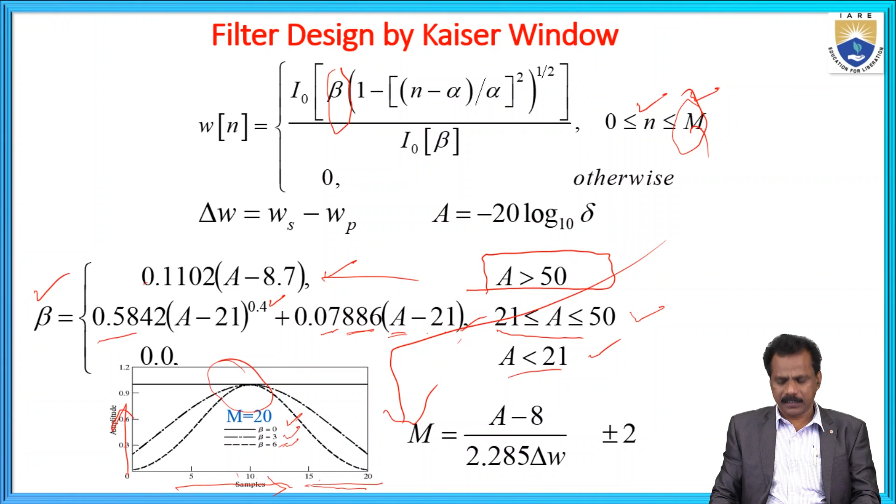With this, the best example is the Kaiser window design of the low pass filter. So we use all these specifications for the graphical representation.

After that, h of n is equal to sine omega c of (n minus alpha), times I naught of beta of 1 minus n minus alpha by alpha square, whole power 1 by 2, divided by I naught into beta. Here also the same condition: 0 less than or equal to n less than or equal to M.

So with this, otherwise 0, where alpha is equal to M by 2; M is already calculated, but here alpha is equal to M by 2, which is equal to 18.5.

So with this, we consider the same beta values. Based on the beta value, M is ready to be identified, and the A value: A greater than or equal to 50, 21 less than or equal to A less than 50, and A less than 21.

Like this, the Kaiser window design of the low pass filter will appear, where A is equal to minus 20 into log base 10 of delta, and delta omega equal to omega s minus omega p.

Next example, based on the same example, we have to follow this step-by-step procedure for designing the Kaiser window design of the low pass filter.

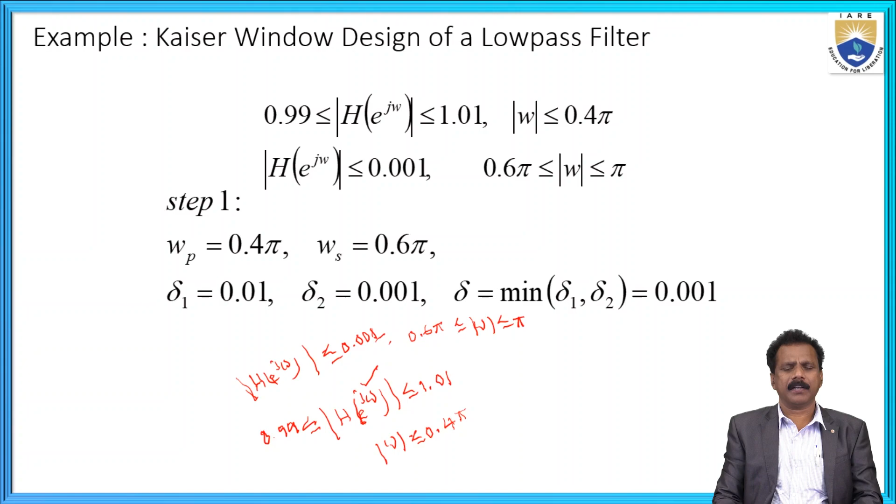So based on this, we follow these steps. Step 1: consider omega p equal to 0.4 pi, omega s equal to 0.6 pi, delta 1 equal to 0.01, delta 2 equal to 0.001, and delta equal to minimum of delta 1 comma delta 2, equal to 0.001. With reference to step 1, we directly write the omega p, omega s, delta 1, delta 2 and delta values ready to be assigned.

Now coming to step number 2: the cutoff frequency omega c is equal to omega s plus omega p by 2, which is also equal to 0.5 pi.

Now coming to step number 3: delta omega is equal to omega s minus omega p, equal to 0.2 pi, where A is equal to minus 20 log base 10 delta, equal to 60, where beta is to be substituted.

Beta is 0.5653, where M is equal to 37. Substituting the A value, A is equal to minus 20 log base 10 delta, equal to 60. From that value, M is substituted as equal to 37. This is related to step number 3.

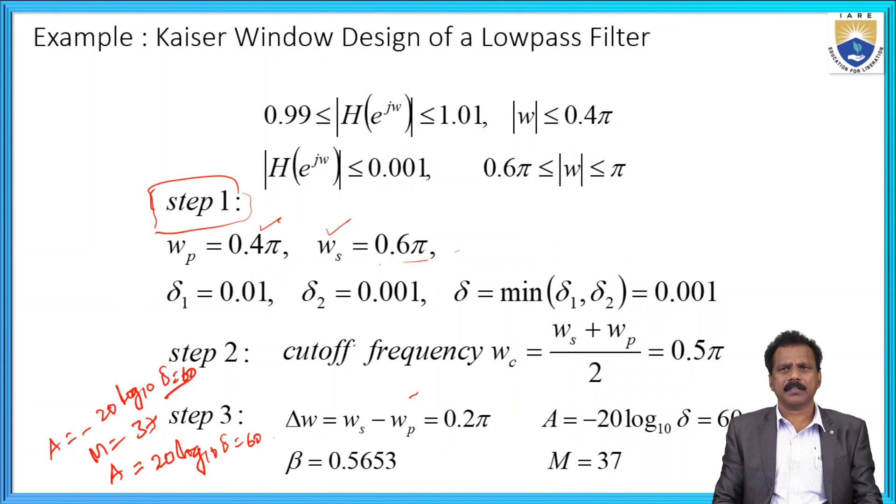Step number 3: delta omega is equal to omega s minus omega p, equal to 0.2 pi. A is equal to minus 20 into log base 10, and delta is equal to 60. So M is calculated as A minus 8 by 2.285 delta omega, approximately 37, that M value. You got the M value.

Now parallel with this, beta is equal to 0.5653. But according to this beta, we know there are conditions: A greater than 50, 21 less than or equal to A less than 50, and A less than 21, using these typical values.

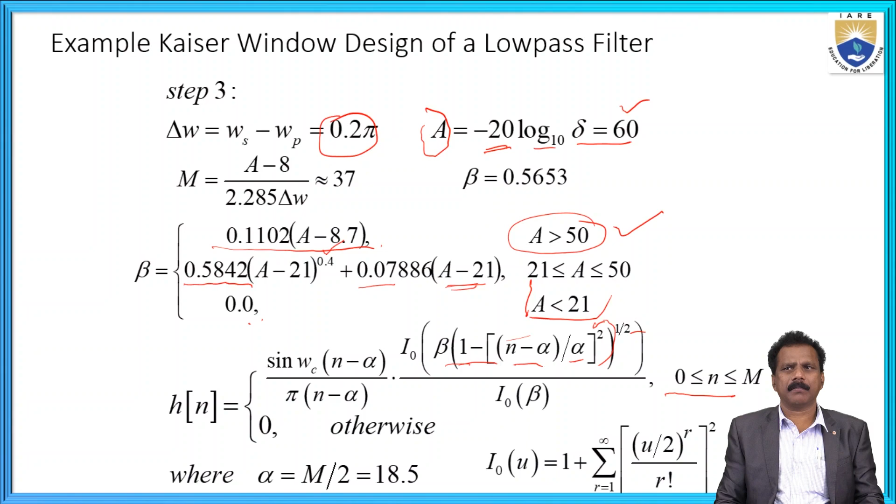Okay, the range 0 less than or equal to n less than or equal to m, that means here it is. So we measure I naught of u is equal to 1 plus summation r equal to 1 to infinity of u by 2 of r by r factorial whole power 2. Okay, so this is the mathematical analysis of this.

So after that, using a piece of code, we are to verify that the response h of n is sine into omega c into n minus alpha by pi of n minus alpha, into I naught of beta of 1 minus n minus alpha by alpha whole square, whole power 1 by 2, by I naught of beta, with 0 less than or equal to n less than or equal to m. With this, we plot number of samples versus amplitude, to see how the response varies, and what are the main lobe and side lobes, to verify.

After that, to decide where it is useful, the Kaiser window design of a low pass filter, whether it's suitable for either recursive or non-recursive, easily to compare what is the importance of this particular window, like in a Kaiser window design of a low pass filter.

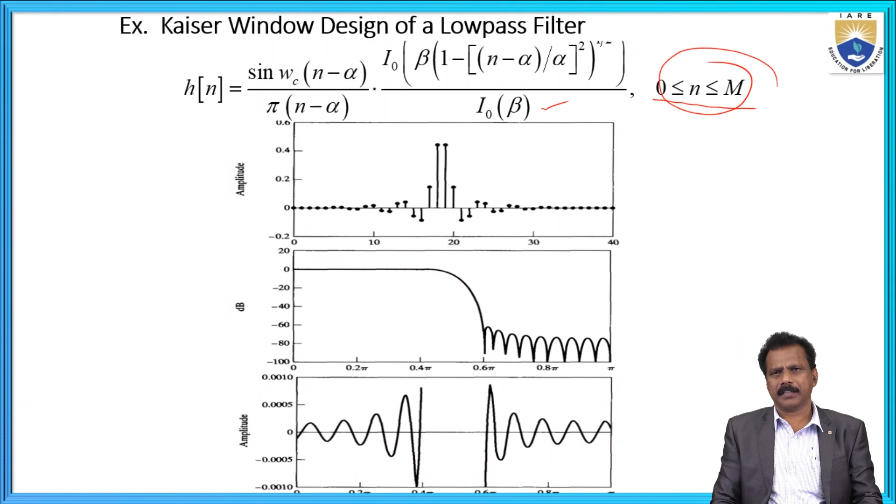Now coming to the relevant examples of finite impulse response filters designed by the Kaiser window method. The ideal high pass filter with generalized linear phase, you have to consider this mathematical relation, where previously we have seen the low pass filter. Now we want to consider the high pass filter with e power j omega equal to 0.

At mod omega less than omega c, e power minus j omega into m by 2, at omega c less than or equal to mod omega less than or equal to pi.

h high pass of e power j omega is equal to e power minus j omega m by 2 minus h low pass of e power j omega. So with this, you can easily measure that h high pass of n is sine pi of n minus m by 2, by pi of n minus m by 2, here also with m by 2.

Minus sine into omega c of n minus m by 2, by pi of n minus m by 2, at minus infinity less than or equal to n less than or equal to infinity.

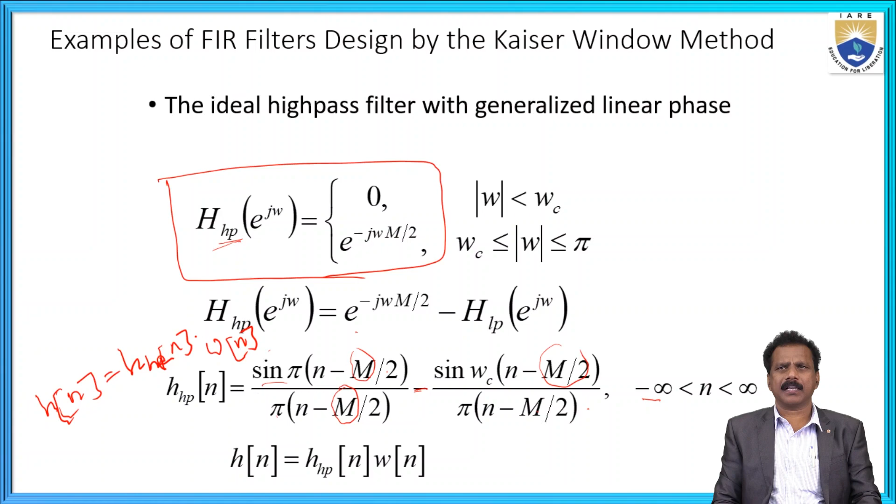Now for the Kaiser window design of the high pass filter, we have to follow certain specifications. The specifications available: mod H d of omega less than or equal to delta 2, where mod omega less than or equal to omega s. This is one way, and 1 minus delta 1 less than or equal to mod H d of omega less than or equal to 1 plus delta 1, at omega p less than or equal to omega less than or equal to pi.

Where omega s is already decided as 0.35 pi, omega p is 0.5 pi, delta 1 is equal to delta 2, which is also equal to delta, which is equal to 0.021. So by the Kaiser window method, beta is equal to 2.6, m is equal to 24.

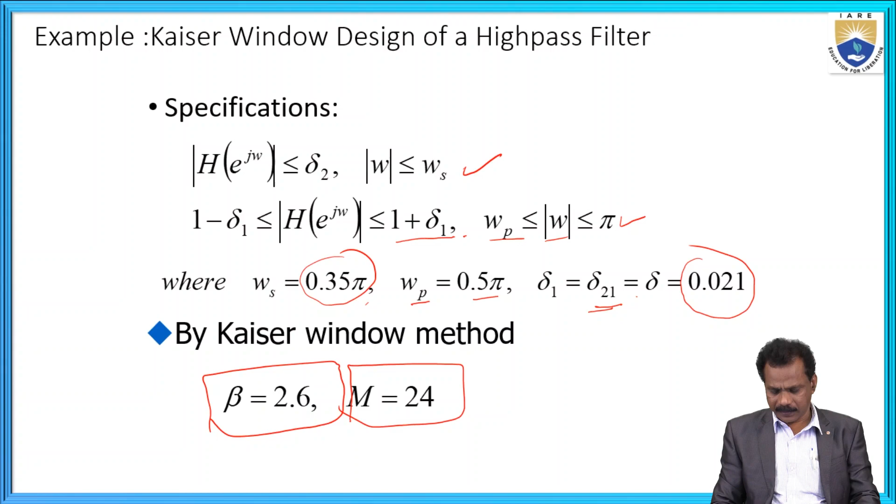In this particular Kaiser window methodology, we have to consider m equal to 24, where beta is equal to 2.6. So with this, after that, try to compare the comments on recursive or non-recursive, so FIR and IIR filter, discrete filter design.

If you are using the IIR filter, closed form formulas, yes. Generalized linear phase, no. Order is lower. Coming to the FIR filter, closed form formulas are not necessary, but generalized linear phase is required, yes, and order is high. So based on this, if you are using the IIR filter it is lower order, if you are using the FIR filter it is higher order. These are the components of IIR and FIR discrete time filters.

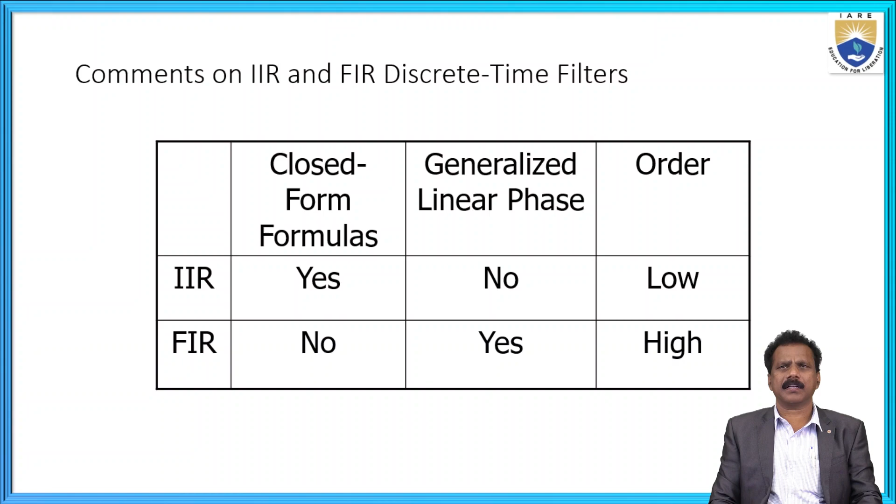By using these comments, you are ready to design according to your task or desirability. If you have any specific response requirement, based on that we have to consider these comments on IIR and FIR discrete time filters.

Now, based on this analysis, what are the filter realizations with rectangular and Hanning windows? Previously we have seen the Kaiser window and Hamming window, but especially in this case, filter realized with rectangular Hanning window. This is related to the response with the rectangular window where M is equal to 16. How does it appear graphically, where H of omega and H d of omega vary in amplitude versus the M value, up to M is equal to 16.

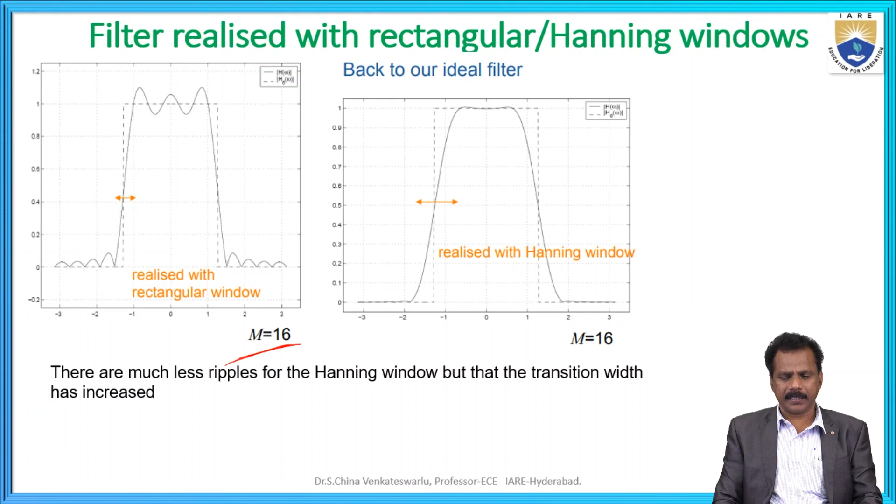So here we are back to our ideal filter realized with the Hanning window where M is equal to 16. Compare the rectangular window and the Hanning window realization. The M value is equal, but whatever is realized with the Hanning window versus the rectangular window, there is much less ripple for the Hanning window, but the transition width has increased compared to the rectangular window.

So another filter realized with the Hanning window, easy to compare. The transition width can be improved by increasing the size of the Hanning window to M is equal to 40. Previously it was mentioned only for M is equal to 16. Here the Hanning window M value goes on increasing, 16, 17, 18, up to 20, 25, up to 40.

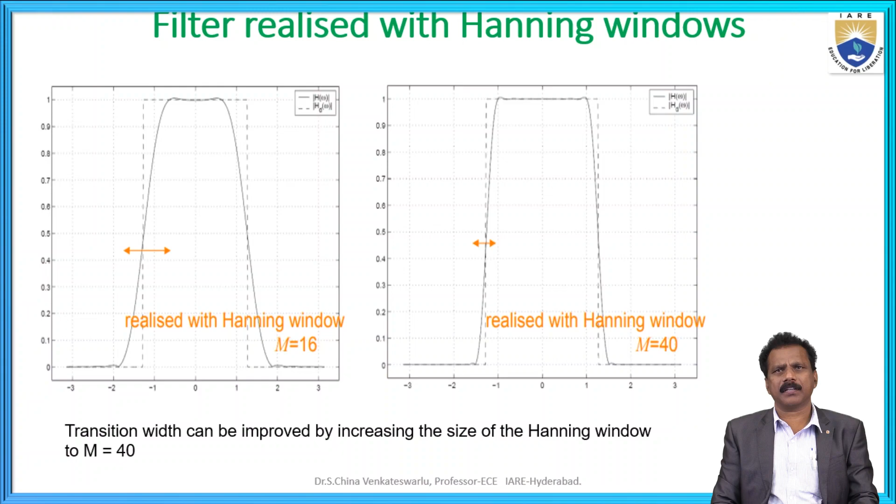So to verify, the filter realization with the Hanning window shows that transition width can be improved by increasing the size of the Hanning window up to M equal to 40, from the initial M equal to 16 to 40. So finally we can decide on the filter realized with the Hanning window. With reference to this, we have already seen the Kaiser window, Dolph-Chebyshev window, and Hamming and rectangular window.

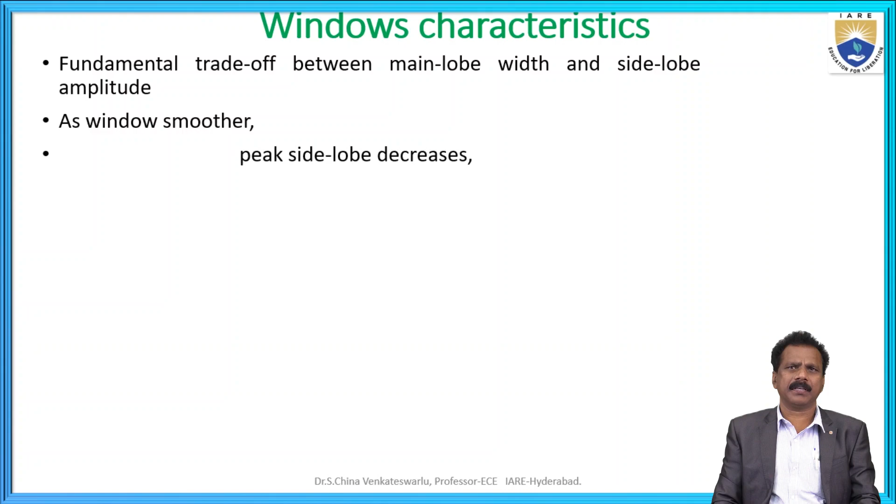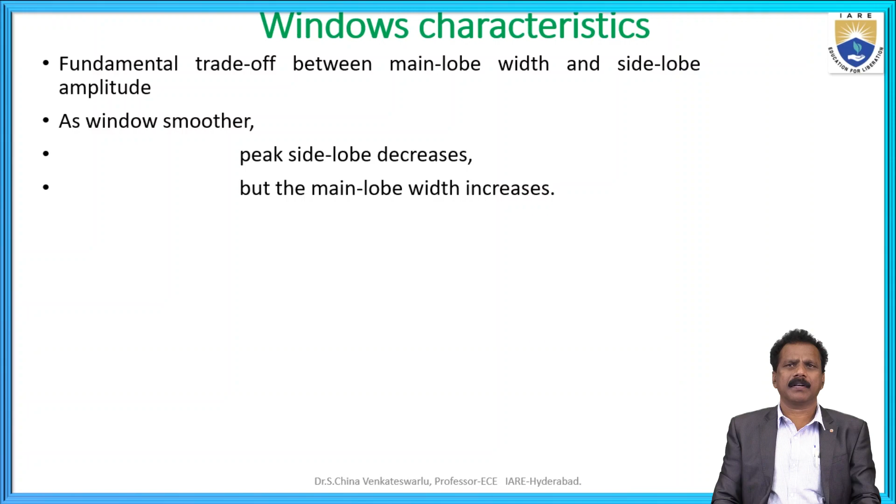So using all these designs, do our windowing characteristics reach our task or not? To verify that, we require these window characteristics. There is a fundamental trade-off between the main lobe width and the side lobe amplitudes. As the window gets smoother, the peak side lobe decreases, but the main lobe width increases. So we need to increase the window length to achieve the same transition bandwidth.

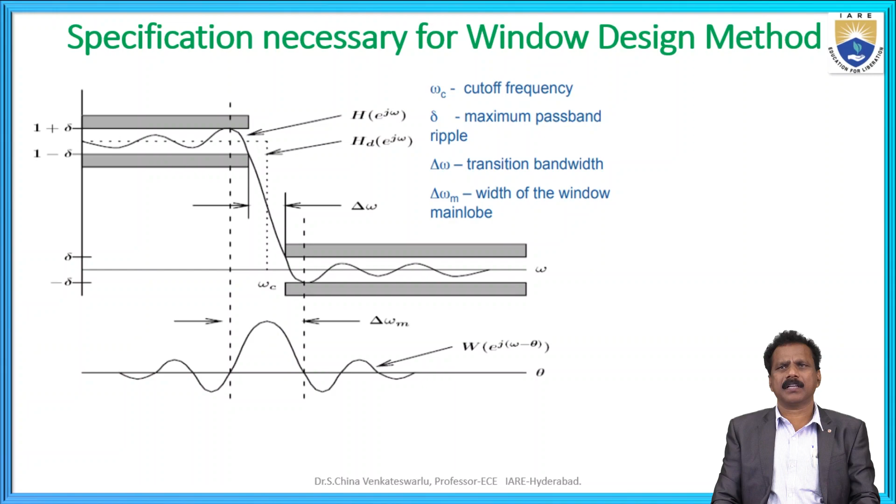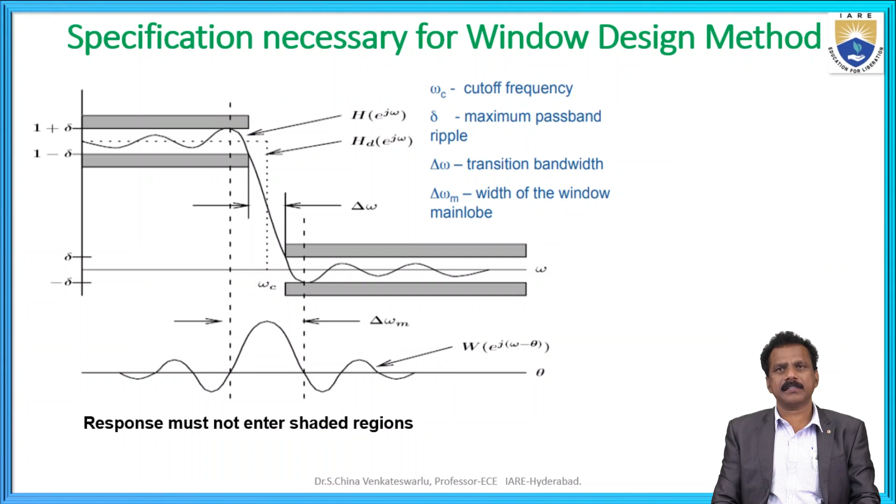So what are the specifications necessary for a window design method? We have to follow these specifications: cutoff frequency, maximum passband ripple, transition bandwidth, and width of the window main lobe. With this, the response must not enter the shaded regions, which we can analyze.

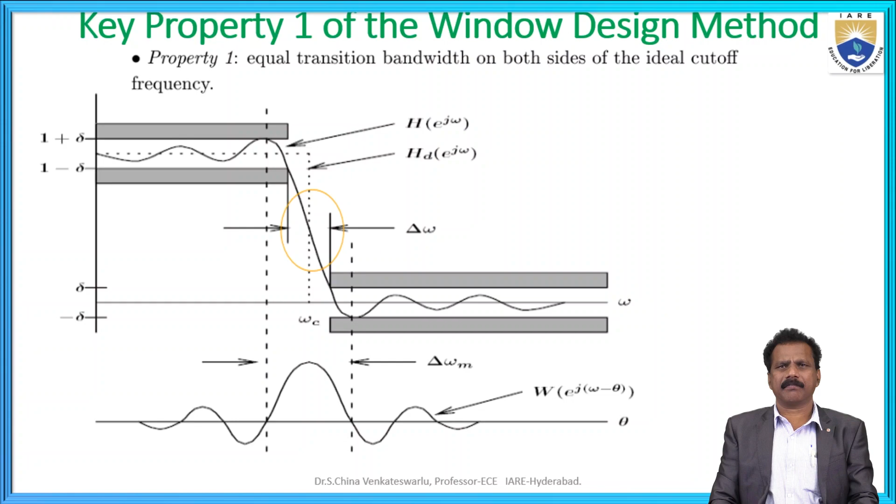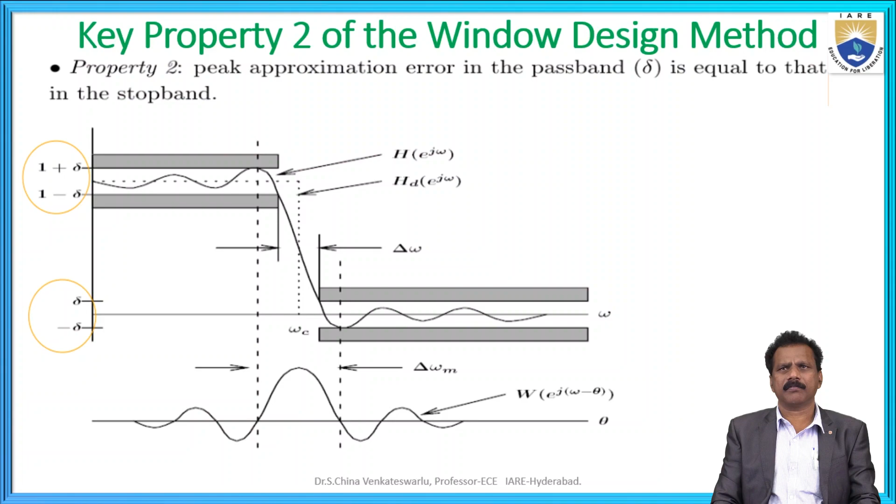Now there is a key property of the window design method we have to consider. Property 1 is equal transition bandwidth on both sides of the ideal cutoff frequency. The second key property, using this graphical representation: property 2 is that the peak approximation error in the passband, delta, is equal to that in the stop band. This is key property 2 of the window design methodology. Now coming to key property 3 of the window design method.

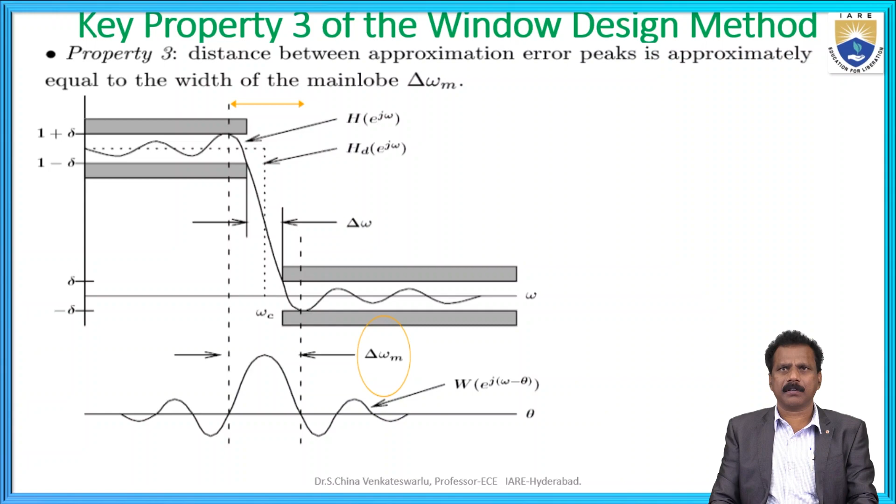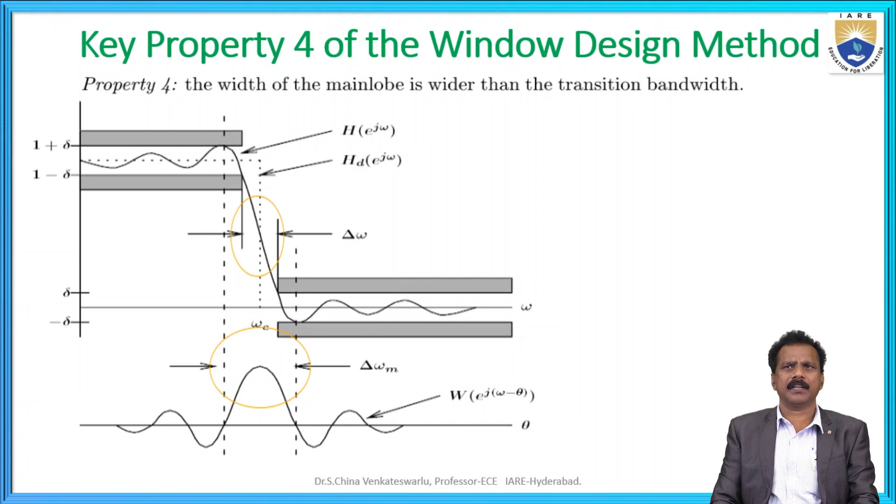Using this graphical identification, property 3 states that the distance between approximation error peaks is approximately equal to the width of the main lobe, delta omega m. Next, property 4 states that the width of the main lobe is wider than the transition width.

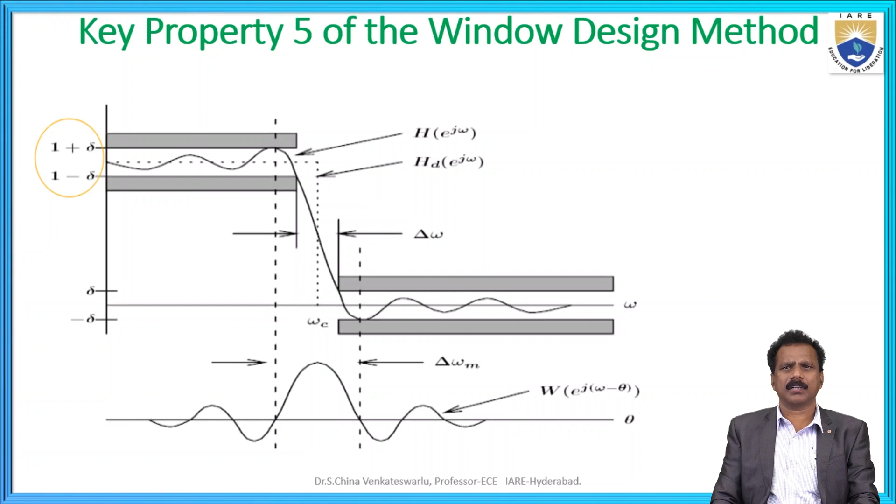Coming to key property 5 of the window design method, using this graphical representation: peak approximation error is determined by the window shape, and the window shape is independent of the filter order. So directly, peak approximation error is determined by the window shape.

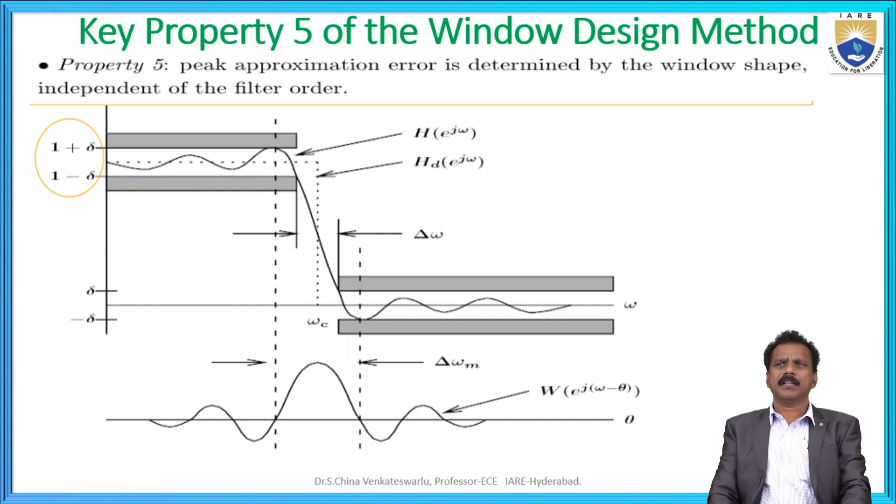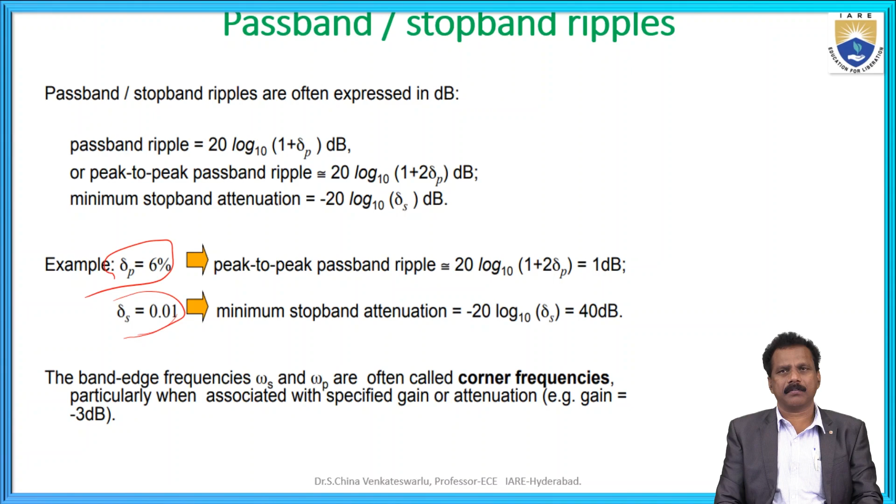One is the corner frequency, particularly when associated with a specified gain or attenuation. The best example is where the gain is equal to minus 3 decibels.

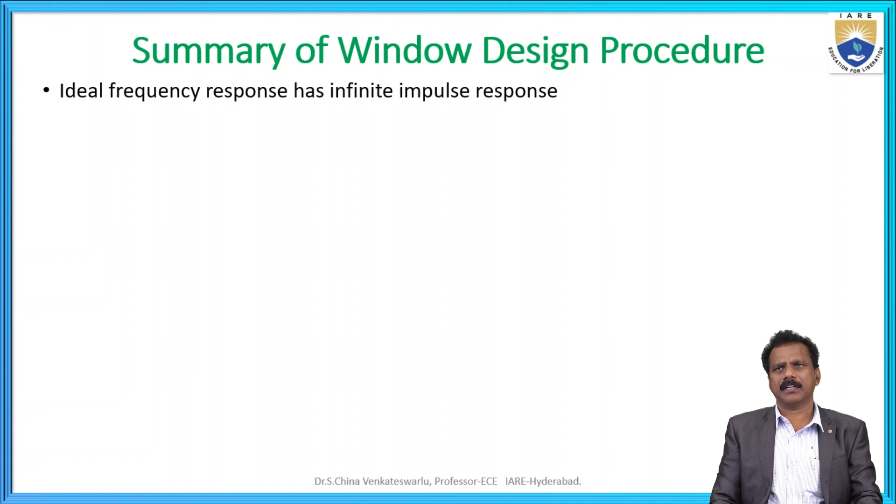First, the ideal frequency response has an infinite impulse response. Second, to be implemented in practice, it has to be truncated and shifted to the right to make it causal.

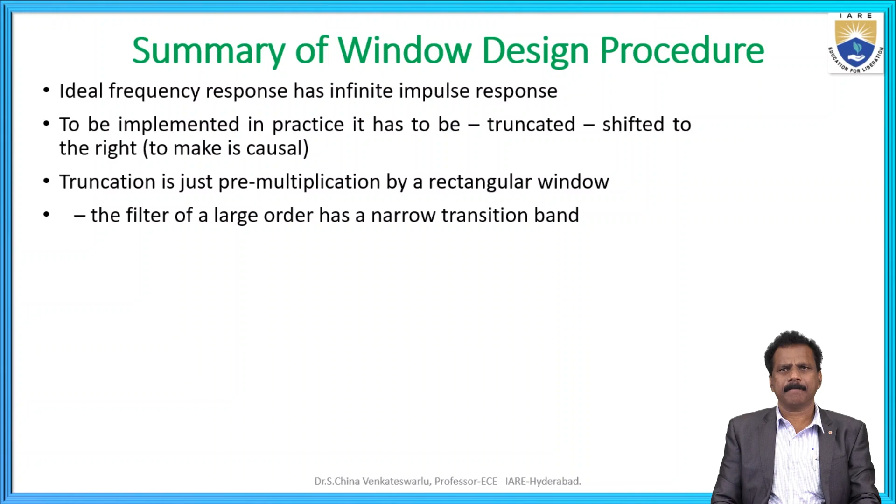Third, truncation is just pre-multiplication by a rectangular window. Fourth, a filter of large order has a narrow transition band.

We have to follow this window design procedure. As we've already seen, it is popular to use windows with no abrupt discontinuity to reduce the Gibbs phenomenon. The best or suitable windows are Hamming and Blackman.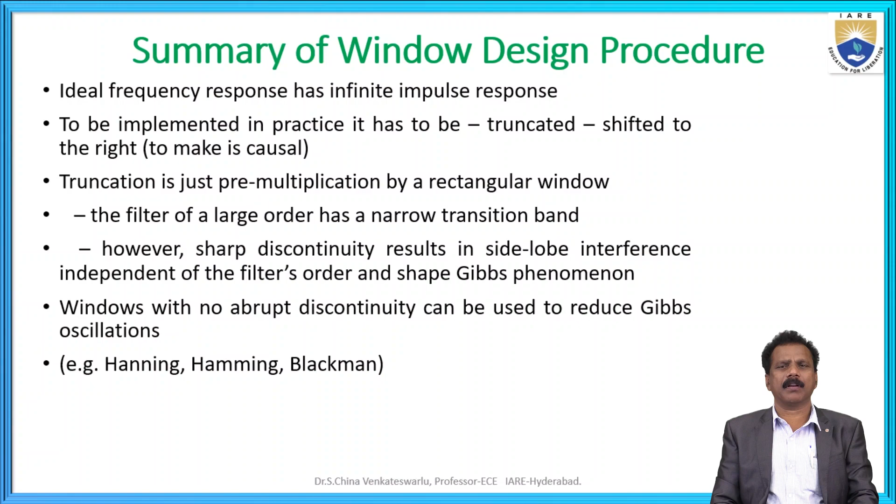So what are the advantages and disadvantages of the windowing technique? After designing using the windowing technique, what are the merits and demerits? The first merit is that it is a simple method to implement to get the desired response.

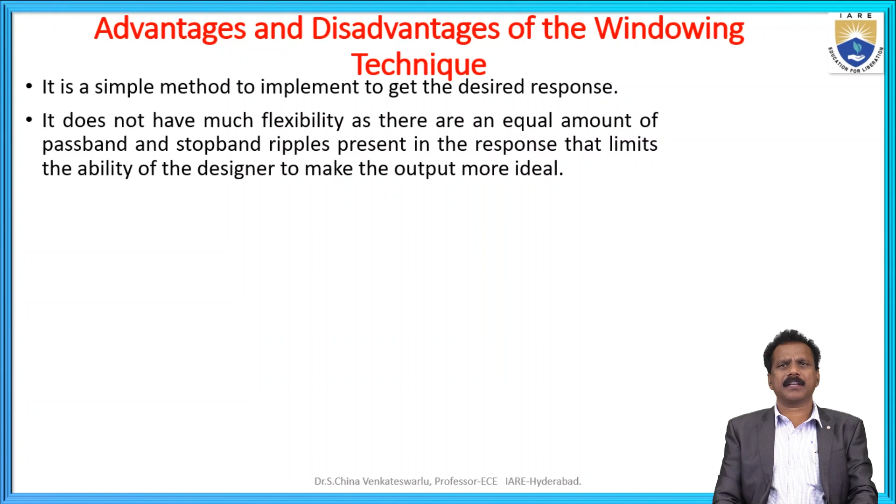The second point is that it does not have much flexibility, as there is an equal amount of passband and stopband ripple present in the response, which limits the designer's ability to make the output more ideal. This is the major issue with the windowing technique.

There is minimum computation involved in executing this technique. So no matter how much we increase the value of M, just now we have seen that up to M equal to 60.

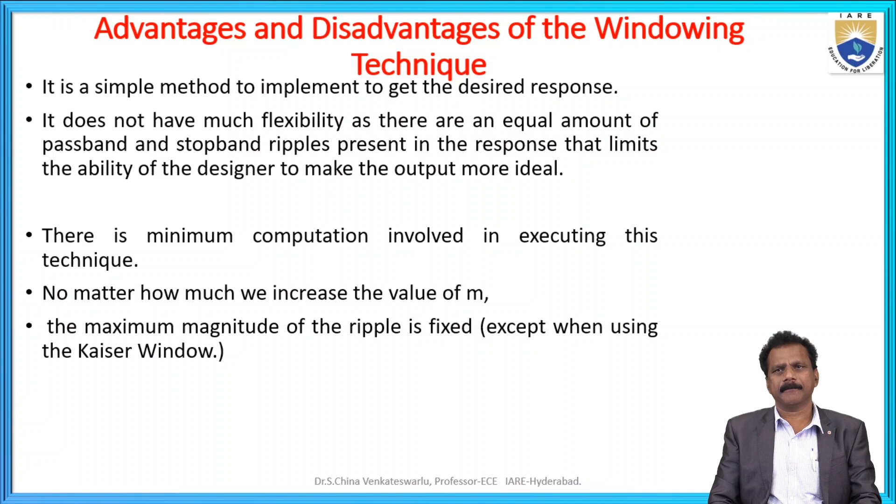The maximum magnitude of the ripple is fixed for all windows except when using the Kaiser window. If we are using a windowing technique, we have to concentrate on the Kaiser window, since the maximum magnitude of the ripple is fixed in all others, due to the convolution of the desired frequency response and the spectrum of the windowing function.

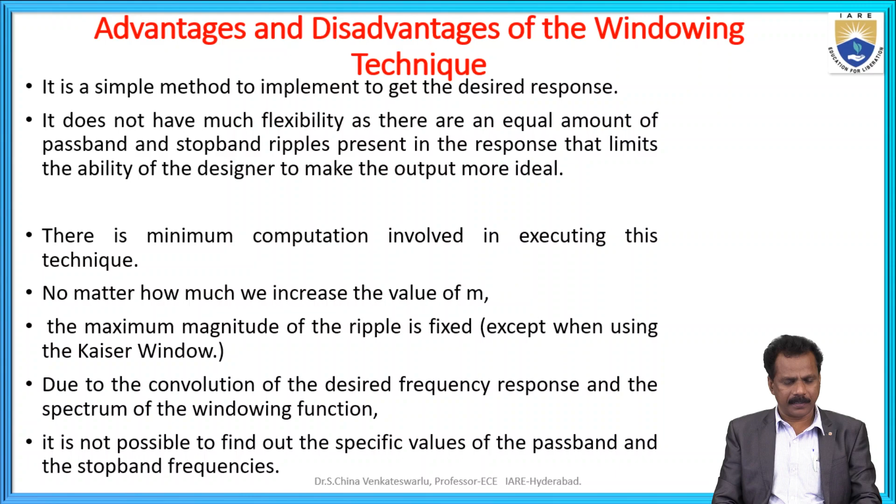So it is not possible to find out the specific values of the pass band and the stop band frequencies.

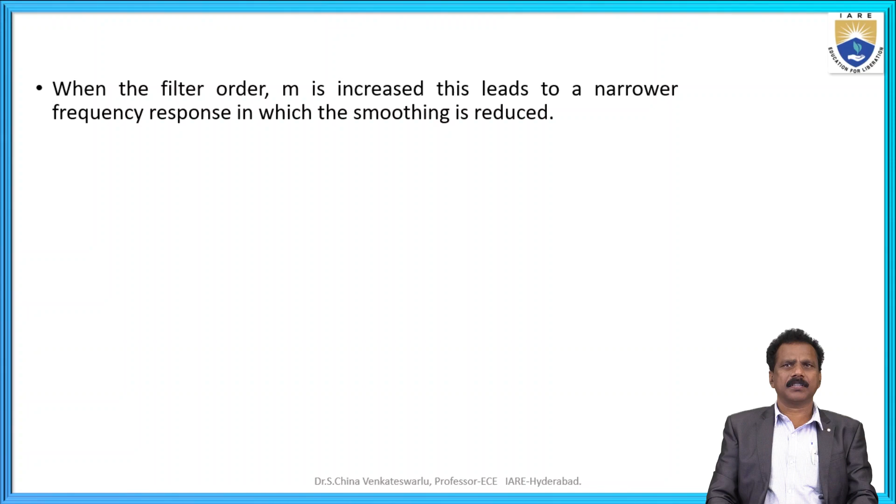When the filter order M is increased, this leads to a narrower frequency response in which the smoothing is reduced. That's why we always have to consider the order of the filter. So when using the windowing methodology, as the order of the filter M increases, this leads to a narrower frequency response in which smoothing is reduced.

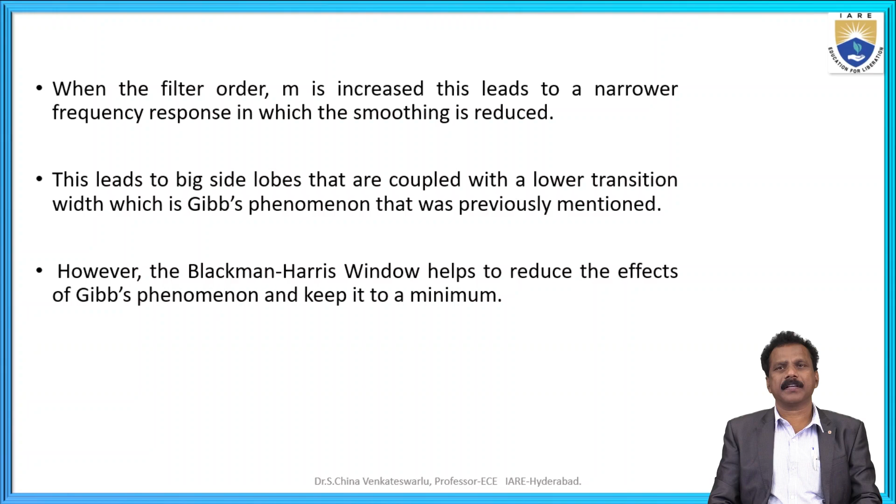This leads to bigger side lobes coupled with a lower transition width, which is the Gibbs phenomenon previously mentioned and already verified. However, the Blackman-Harris window helps to reduce the effects of Gibbs phenomenon and keep it to a minimum.

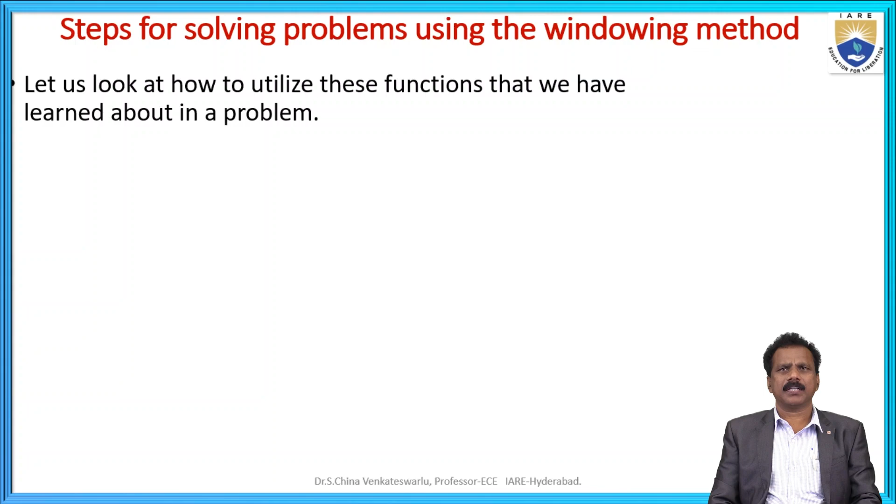Using all this summary, here are the steps for solving problems using the windowing methods, both numerically and graphically, using software or hardware, whatever it is. You have to follow all these steps for solving problems using the windowing method. Let us look at how to utilize these functions in a problem.

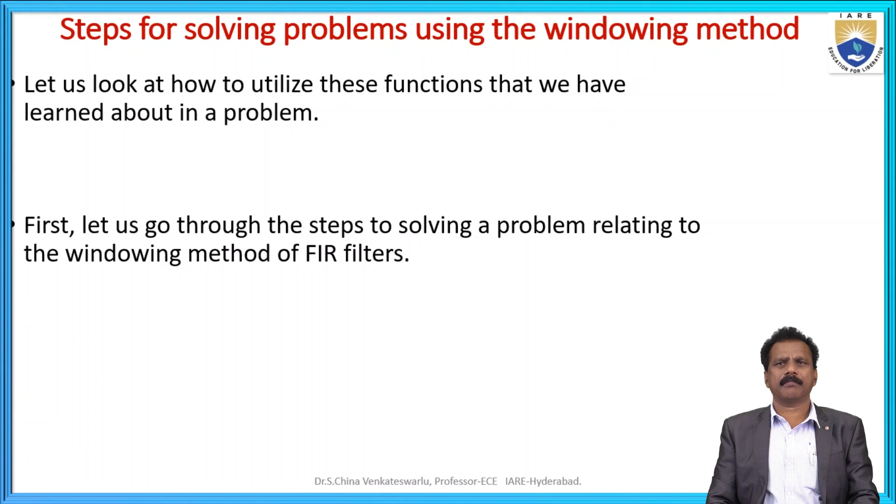First, let us go through the steps for solving problems relating to the windowing method of finite impulse response filter, the FIR filter. These are the steps you have to follow. Step 1: find h of omega, where h of omega equals e power minus j alpha omega.

The equation can be given directly. The value of M can be given, and you have to calculate alpha equal to M minus 1 by 2, the phase delay. With the value of alpha, you can find h of omega.

This value can be given directly. The cutoff frequency fc can be given, with which you find omega c equal to 2 pi into fc. The sampling frequency fs can be given, with which you find omega c equal to 2 pi fc by fs. This is step 1.

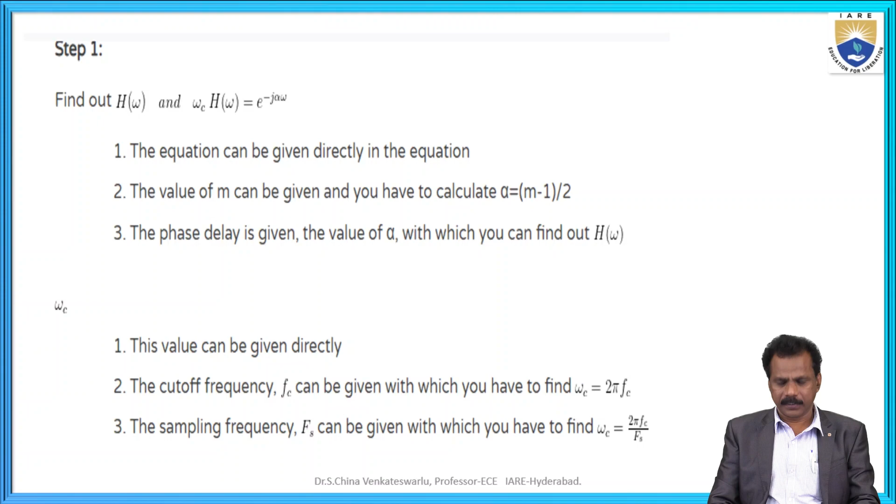Coming to step 2: now we find the value of h of n, the impulse response of the FIR filter, by taking the inverse discrete Fourier transform of h of omega, for omega less than or equal to omega c. So h of n equals 1 by 2 pi times the integral from minus pi to pi of h of omega into e power j omega n, d omega.

After that, try to calculate for a low pass filter. If you are considering a low pass filter, calculate h of n equal to 1 by pi of (n minus alpha), into sine of (n minus alpha) into omega c, the cutoff frequency.